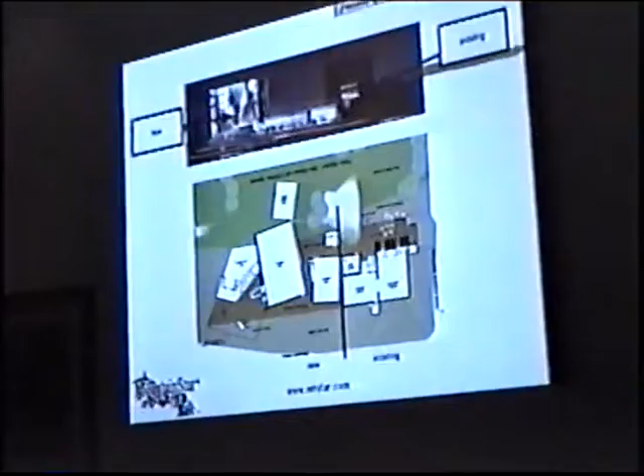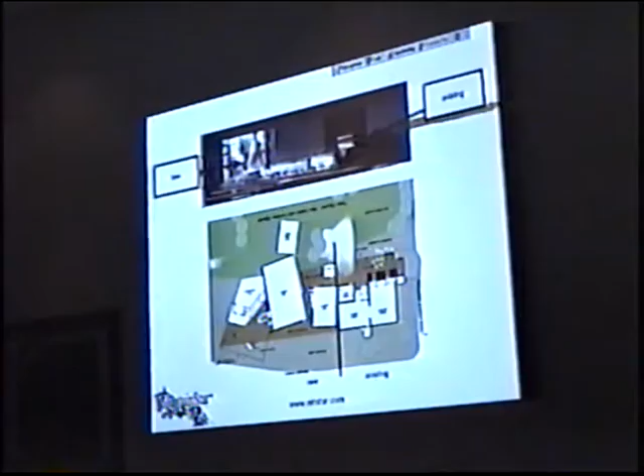Conceptually, that red line shows you what we call a demarcation. This is kind of a flipped around drawing, but on the right again, the Barnes building, and on the left, the expansion concepts. And with some of the design parameters that they wanted to have for functionality in the space, we had to look at a couple of alternate methods. Well, what were the big things we looked at? Well, they had some structural look that they wanted to have to some of that glass that you can see with the lights up above there.

They wanted to have a look where they have these very thin columns, and they didn't want to put passive protection. They didn't want to use intumescent paints. So we talked to them about a strategy where, in addition to just normal sprinkling of the building, we could wet columns with water. And we would have to design in certain safeguards. I'll let Ben go through a little bit more of that in detail. But there were select areas where we wanted to do that.

We treated the gallery space as a mall, so we put in smoke control provisions there where we would use what's called the purge or exhaust method, which basically purges the space, and we would exhaust the common gallery area as one zone, tripped by smoke detection of some sort in there, right, Bob? Yeah, detectors. Yeah, okay.

And then we had 3 openings into the existing building. They wanted these large communicating spaces through this firewall, but they didn't want fire shutters. They didn't want anything that would restrict this beautiful view that they wanted to have between the new and existing facility.

So we ended up using what's called the airflow method, where, depending on the fire scenario, whether the fire was in this structure or this structure, we would have air flowing in a direction of 200 feet per minute so that we could restrict some of the smoke byproducts that could spread from one building into the other.

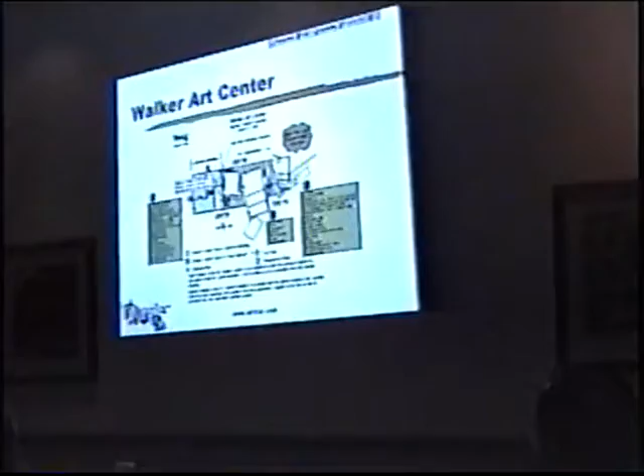So big picture, we ended up taking the building with several equivalencies. We had to analyze the exiting of the Barnes building, the level of protection, and we came up with a strategy where in the existing building, we required them to upgrade it to make it better. We put in early warning detection, voice communication.

We wrote up an operational plan using guidelines that the fire department gave us, which would restrict fire loads, the types of materials they could put in there. We did an exiting study, a timed exiting study, to figure out if we could get the exits to flow properly and how long it would take to evacuate in an emergency.

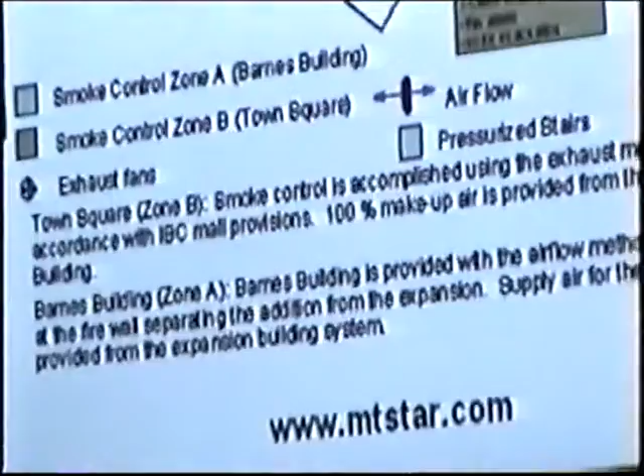We also put in fire department communications, and then a very specific inspection, testing, and maintenance program and emergency evacuation plan. So we tied all that together to work with in the Barnes building. Now, later on, we're going to go through a specific challenge of getting some of the smoke detection in the Barnes building because of some of the construction.

And with the Barnes building, we knew, generally speaking, that the displays they were putting in there were generally spread out. Every so often they'll build sub-rooms and try some things. I know they have a couple of displays where you actually walk in an enclosed space and you see some projection on the wall. But they tend to be very creative.

As I mentioned, it's a pinwheel. If you've been in there, it's like a pinwheel effect as you go up galleries, as you step up through, and you have a central core stair, and then some exit stairs on the periphery. Most of the people, of course, would use that central core stair or elevators in the center to circulate through the building or evacuate.

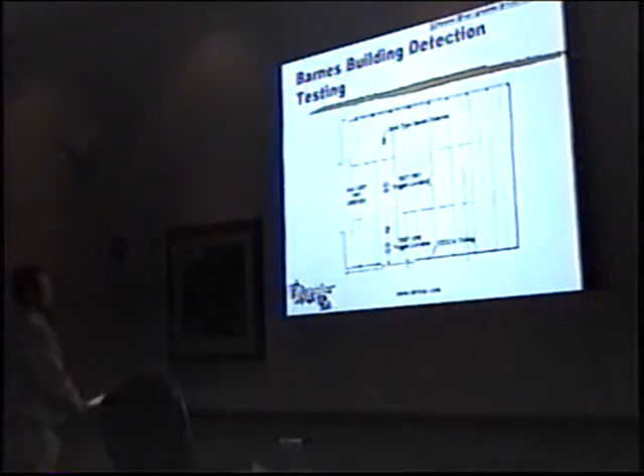And so we ended up proposing to put it around the perimeter of the galleries and then coming up with some mock-up testing to try to verify whether or not we could get some sort of reading from that VESDA system, because the VESDA tubing was basically concealed behind a part of a pocket of a wall. It was exposed to the atmosphere, but it was kind of screened by a partial wall. So we ended up running some mock-up tests on that.

You want to take a swing at that then? I can. I sure can, Harold. Keep going. Okay.

So, looking at this mock-up testing, what Mike is saying, we have the VESDA system around the perimeter. Bob, anytime you want to jump in on anything here. As contractors, you've all heard this before, we look at doing something different than maybe what code would require. Spot detectors in each of these bays, really deep beam pockets here.

So what did Gordy ask us when we were sitting in a meeting? What does code say you need to do? Well, smokes in each of the bays. We try to put this VESDA system around the outside. Well, the question came up, how is that going to perform relative to what code is going to require? Is it actually equivalent, since that's what we're proposing, equivalency? How does it perform in relation to what code requires?

The way that we came up to answer that is a mock-up. Actually install both systems at the same time, put smoke in a room, and see how they react. Actually come out with hard data and printouts, and with people standing there watching, when do these alarms come in, VESDA versus the spot smoke detection, let's see how they perform. Is it equivalent to what we proposed?

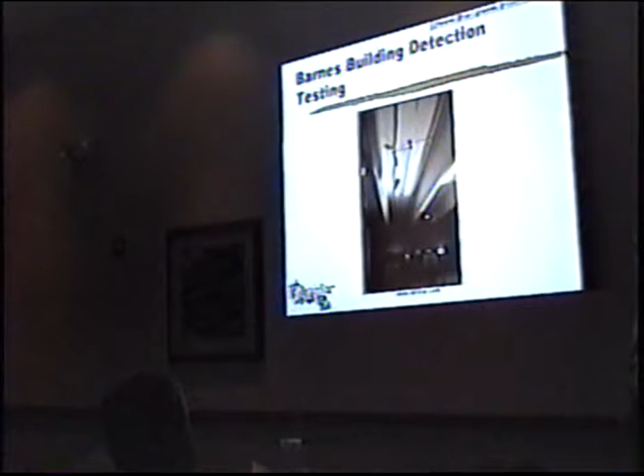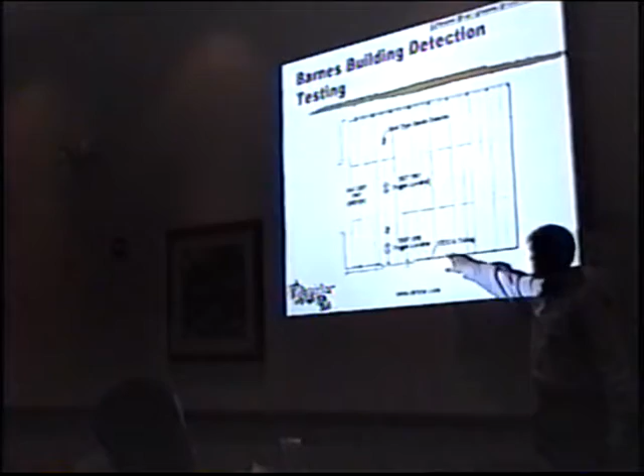So what we did was put the spot smoke detectors in one of these bays in 2 locations. Can you go back one slide real quick. You see the spot smoke detection in these bays. And we got a theatrical fogger and set up 2 locations, one in between the VESDA piping and the spot detection, and the other one was in between 2 of the spot detectors.

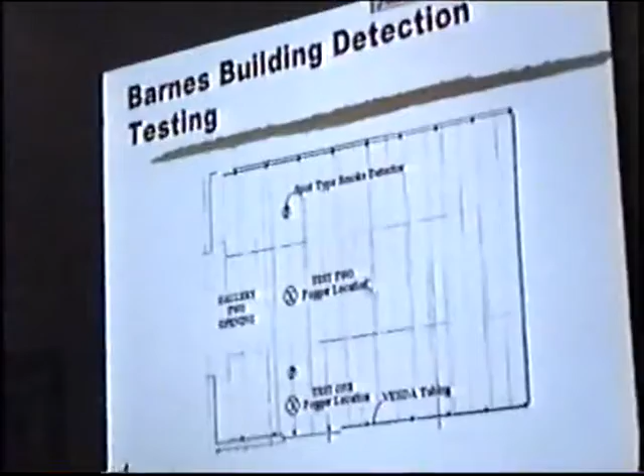So what we were trying to do was place smoke in a room, see which one is going to go off first, and measure the difference. If the spots are going to go off first versus the VESDA, is it a big enough difference for it to really make a difference to us? The answer in both of these was that the spot detectors went off before the VESDA did. With the spot detectors out in the bays and more of them, of course they're going to go off. The smoke's going to hit those before it gets to the edges of the room. We know that, but is it enough of a difference to say that it's not equivalent?

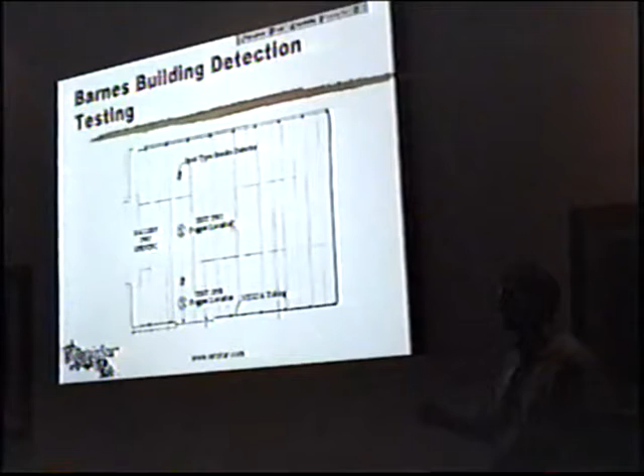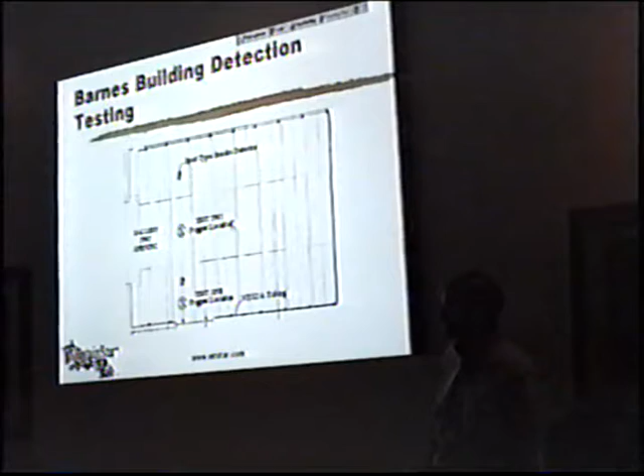Well, the answer that we came up with in doing the actual field observation, actually putting smoke in the space, was no, the difference was not so significant that we could not proceed with the proposal of putting VESDA. And the city did accept that, did accept the testing, and go ahead. And this is just a couple of shots here of that actual mock-up. See those beam pockets, how deep they are. Yeah, these are really deep beam pockets here.

So this is filling that space up with smoke, and this looks like probably in between the 2 spot detectors. So again, when we're in between those 2, of course, it's going to hit those spots before it gets out to the edges of the room to the VESDA system, but still, the VESDA operated with it way out on the edges of the room, so close to the spot detector activation that we were able to say the performance will be equivalent to what code requires, and justified it through actual field observation.

Let me just make one comment, then we'll talk about the structural protection. You know, there's always controversy or discussion about when you use smoke bombs or any kind of smoke. One of the difficult things is trying to replicate the fire dynamics of what would actually happen in a space. This is cold smoke. So as you can see, Ben's got an extension on that tube there, and we're trying to direct it up at the ceiling. So the dynamics do change dramatically using cold smoke.

But again, we were just trying to get a relative reference base for this, since we were proposing this alternate. And again, going to the VESDA system, knowing its sensitivity level compared to a traditional spot detector, we thought that we would have advantages of using that and satisfying the need that the Walker Art Center wanted as far as the look. They didn't want all the piping or detectors. But it was important because mock-up testing was an important aspect to try to see, well, is our theory within the realm of possibility.

The next one that we're going to go through was structural protection. As I mentioned, there were several areas where we were proposing using sprinkler coverage in lieu of passive protection. This has been used quite readily in different projects around the state of Minnesota and elsewhere. The city of Minneapolis has refined and put together some policies as it pertains to this. But we had to do a study of the space and study different scenarios to determine what would be the appropriate level of protection.

And to assist on that, the city of Minneapolis contracted the city of St. Paul, and Chris Cahill was involved a lot in this part of the project as well, to provide some input as to what are some of the technical things we should be looking at and some of the parameters we should be considering. And as an end result, we did come up with a strategy that we felt met the spirit and intent of the code and was a defendable plan that could be serviced and maintained. And so we worked collaboratively to try to come up with a strategy.

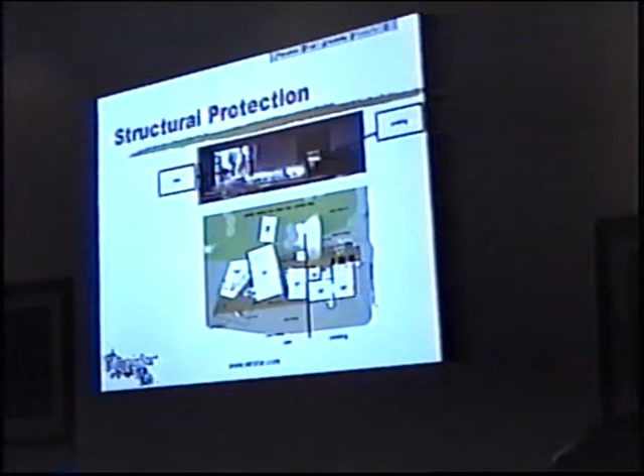As the engineer of record on the performance design, we still had to do the appropriate documentation, but we felt, given all the constraints on the structure and the aesthetics, and then trying to meet the fire protection guidelines, we had to work together as a team. And quite frankly, we have to try to make sure that we're not going to collapse a structure that is a Type 1 fire resistant structure. Fortunately, there were some factors of safety built into the structural components we were looking at, so we knew we had some redundancy in the design.

But again, to prove out some of the sprinkler techniques we were going to use, the city asked us to consider putting together a mock-up. And so we put together mock-up testing with the assistance of Skyline and our offices. We at Mortensen put together some mock-up tests so we could look at spray patterns to see if we were going to get the type of discharges we wanted to protect the structure. So Ben, I'll let you kind of go from there.

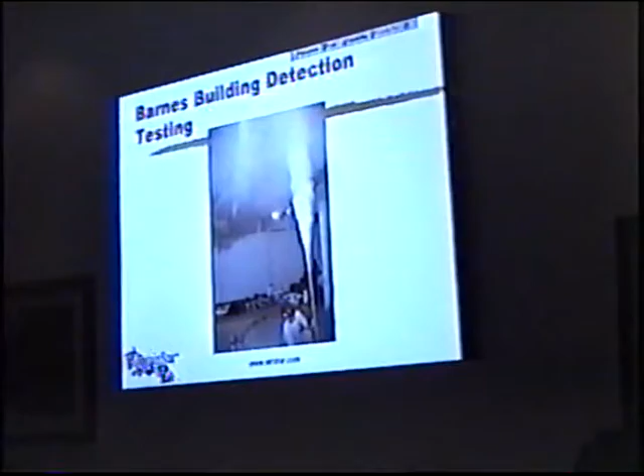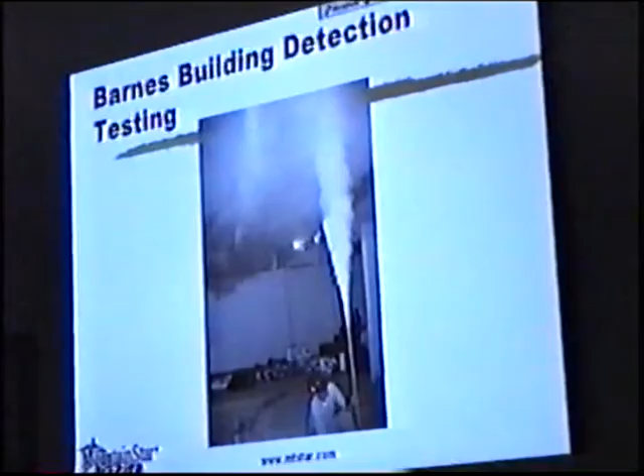Yeah, before I take off on the structural, I want to go back to the detection for just one second and ask Bob. We've never talked about this, I don't think. Were you surprised at all by the results that, even when we were in between the spot detector and the VESDA, the spot detection still went off faster than the VESDA did in most scenarios? It wasn't surprising because of the location of the detection and the air movement in the building, where, like you said, it didn't hit the edges of the building. The edges of the room are the hardest thing to protect because you've got a curve, basically a virtual curve where the smoke doesn't travel evenly.

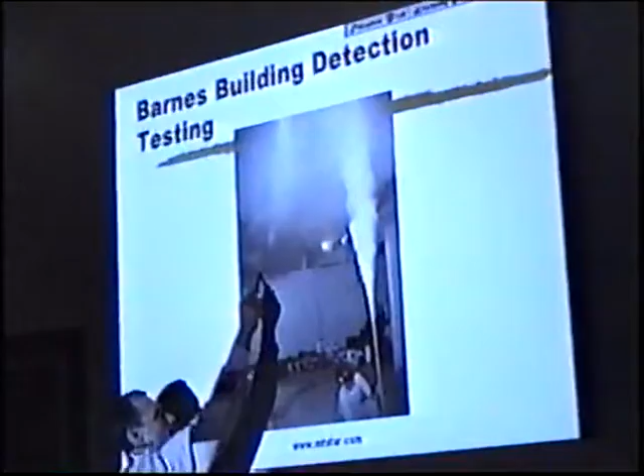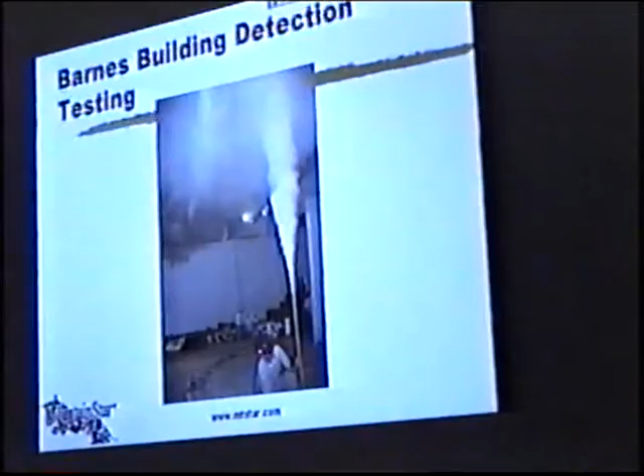So we knew, we had done some tests before that. We had gone through a lot of discussion. We were pretty positive the smoke detectors were going to go off, and you and I had talked about that. We were also positive that the VESDA would respond as well. Right, and the VESDA too, how far down from the ceiling was that VESDA? It's right in it, right there. Yeah, it was about 3-4 feet down from the actual ceiling. Right. Because you had a different weird airflow too. You remember the diffusers, the supply diffusers were on the floor, and the return diffusers were up through the ceiling. So it was almost a backwards flow, the other way around.

Sorry, supply in the ceiling, and return way down on the floor. We had looked at putting the VESDA across the return air grill on the floor as it sucked up. We couldn't get enough air movement to justify pulling the smoke down. It was real difficult to get in there because of the architectural, and we played around with copper piping, some different tubing materials. So, Art Olson was the hero in that one. Yeah, Art did a great job.

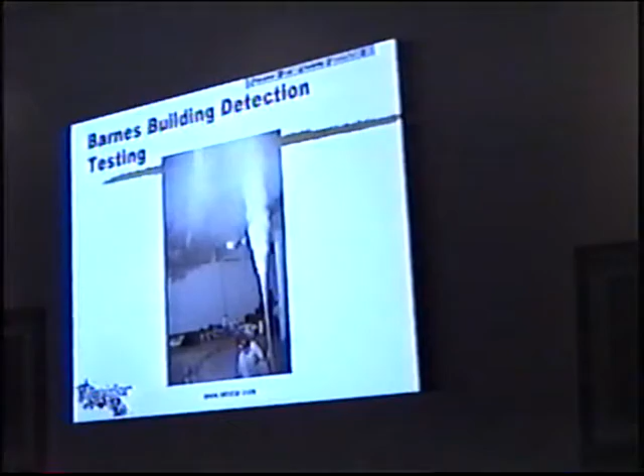But again, we wanted total detection throughout the Barnes building because we felt early detection would help us get people evacuated and call in the necessary emergency responders. When we did our timed exiting studies, we felt that if we got prompt response, we could get people moving out of the building, particularly with the security staff they had and the voice evacuation system. A lot of the statistical data shows that if we have a voice evacuation system combined with trained staff, we can get people moving more readily to leave the building.

We wanted to get them moving out the door, but we had to balance the constraints we had with the owner's desire for aesthetics.

They consider smoke detectors barnacles. Yeah, well, they consider any fire protection a barnacle. You scrape it off. Yeah.

All right, now we started talking about the structural protection. Again, this was an alternate method that was proposed because the architect needed to provide 2 hours on the columns and didn't want spray applied fireproofing or intumescents. They wanted a certain look on the columns, and so that's when we employ active systems in lieu of passive systems. Yeah, we had several areas where we used this active protection on the columns as well as some glass in some areas to provide the actual fire protection.

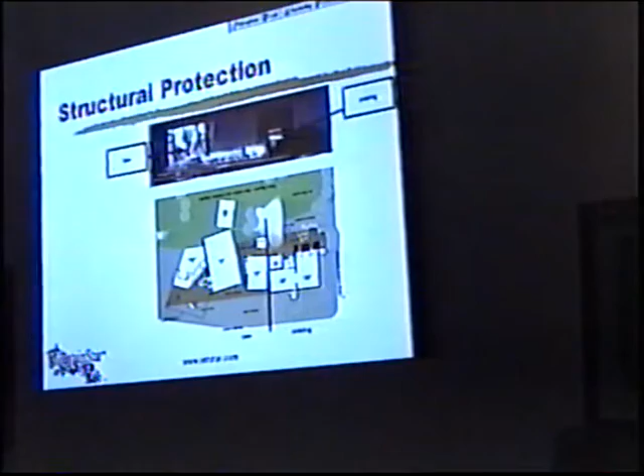And again, if anybody has any questions, fire them off at me. And Bob and Brian, if you guys want to jump in anywhere, Skyline was involved with the sprinkler aspect of this. And again, like the smoke detection, there was much discussion and tinkering with the ideas, tweaking this and that, even down to part of the mock-up, just turning the deflector position a certain way. And that changes the whole design that you've been basing this project on for 3 years.

Yeah, this goes back to the importance of actually observing your idea in the field, doing these mock-ups, and something can look great on paper. I think it's very important from the code official side of things to the contractor side of things for you guys to be comfortable that what we proposed and what you're installing is good and is going to work. Let's look at it, let's mock it up, run through some scenarios.

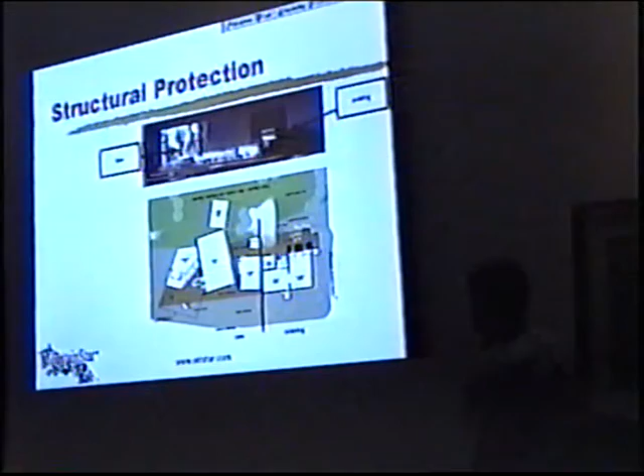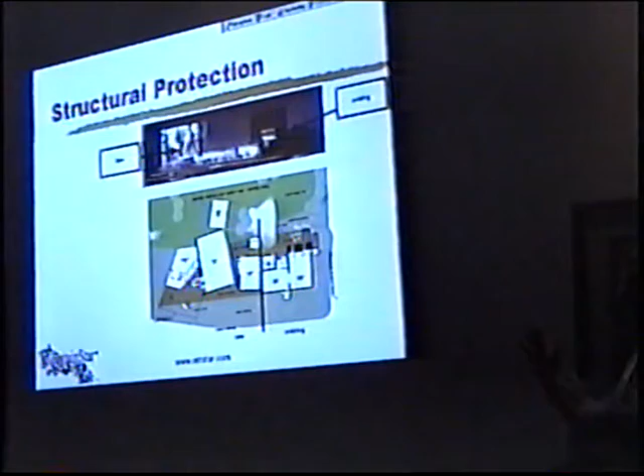For the steel protection of the glass, we had, like I said, several areas. Hennepin Lounge along here, we had kind of a unique situation where we had steel columns sandwiched between glass on each side, interior and exterior, in the middle of these columns. The columns required fire protection, and we were using sprinklers to achieve that fire protection.

Now that presented a couple of issues. One, we had to protect the glass on the interior, and then the columns. How are we going to protect the columns when we had to put sprinklers in that dead airspace, and position those so that they're wetting the columns all the way down with sufficient water so that we can cool that steel and protect the glass as well? Go ahead with the slide.

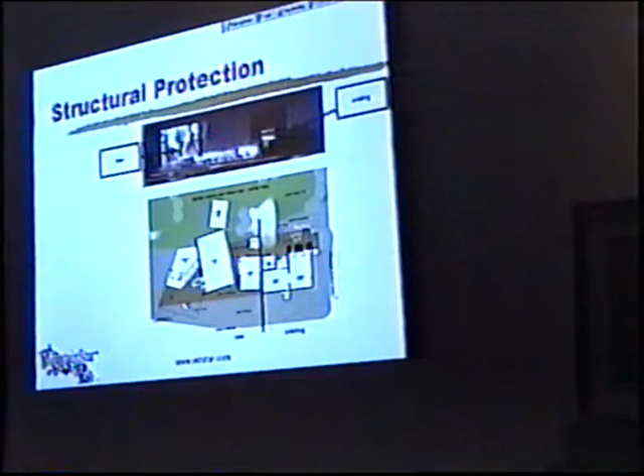That was one of the challenges that Skyline faced and had to meet, was designing this system so that the areas of the equivalency were fed basically on their own system, so that you could shut off all the standard floor coverage and not affect these areas at all. All of these areas had to operate as intended based solely on city pressure. So fire pump fails, that's fine. We still meet the required flow and pressure. So we looked at that several different ways.

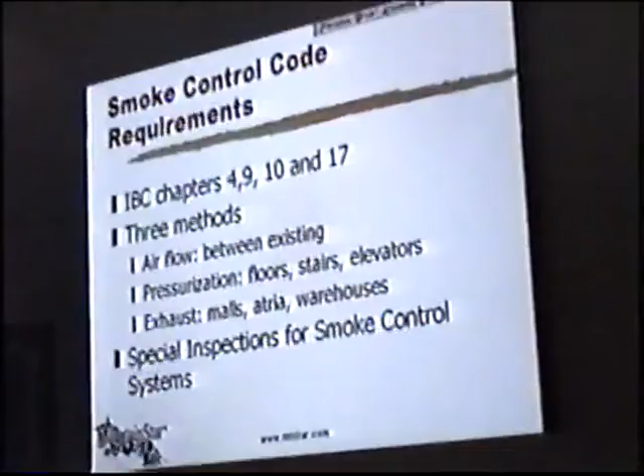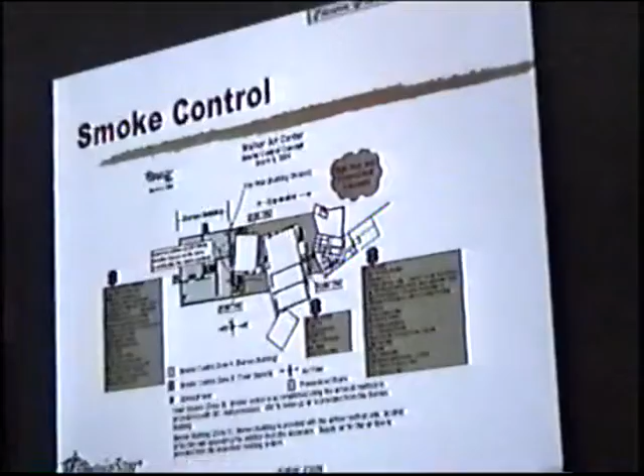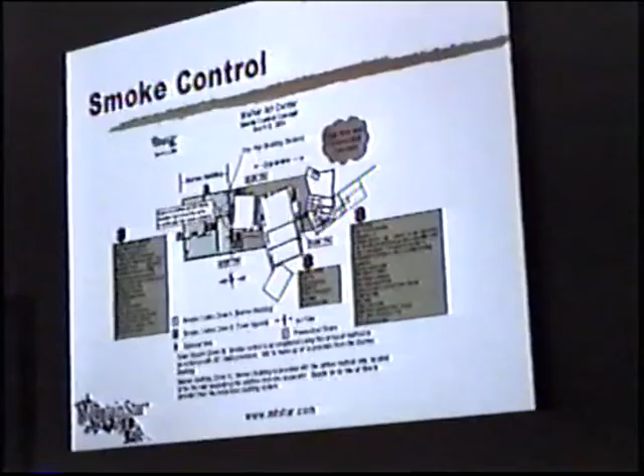That was just those. I wanted to talk a little bit about smoke control. And again, we were treating the gallery spaces as a mall. This is a busy slide, but okay. The Barnes building did not have smoke control per se, but we did have 3 openings here in this firewall that we were going to create an airflow of at least 200 feet per minute. And depending on the scenario, the air might come into the Barnes building or go out into the expansion project.

And again, the idea was to restrict the spread of smoke and toxic products of combustion. And 200 feet per minute came out of some of the SFPE authoritative literature and NIST information that we knew we could at least impede some of the smoke spread. Now, in this gallery space, we used a purge method with 3 fans, but we were purging that gallery just like we would an atrium.

And we would provide makeup air either coming from the Barnes building or select points in the space so that we could keep a theoretical smoke layer height at least 10 feet above the exiting people so that they could get out. That's the intent of the smoke control system, to provide tenable egress and keep this theoretical smoke layer height above the exiting people. The design fire loads you look at are anywhere from 2,000 to 5,000 BTUs per second. We used an axis-symmetric fire, and we felt that would get the most entrained air into that.

And again, Steve, it comes up to that same question. We use some of these operational plans to try to curtail some of the fire loads in the space. Does the smoke control system slow down the operation of the sprinklers? That's a good question. I was out on a project on the left coast, and Steve Gentleman from FM Global brought up that same question on the life safety smoke control system. Were we venting all the convective gases and the heat that we would need to set off the sprinkler system? And we felt that would not be the case. However, I think that's going to require closer scrutiny in the future. That was an interesting question.